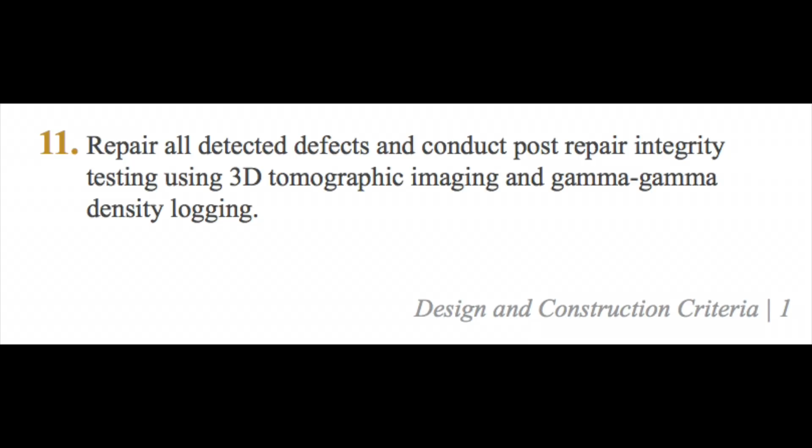I want to show you part of their design requirements: that if they conduct repairs, integrity testing using 3D tomographic imaging and gamma-gamma density logging was required per the contract if they ran across issues. Yet we know none of that happened. This video is also going to explore transverse cables and how I think they were part of the problem, not transferring the forces over to the longitudinal cables.

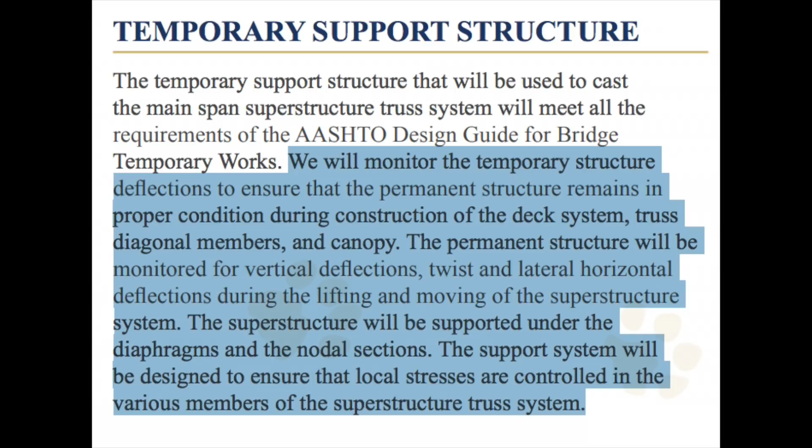Here's a screenshot of the monitoring program, showing it was very important they were going to monitor this deck system. Also, the diagonals were supposed to be supported during transportation, with members supported under the nodes. We know all the nodes were not supported during transportation, only a couple of load points. Here's the monitoring company's tweet, before they removed it, showing the supports not under the nodes.

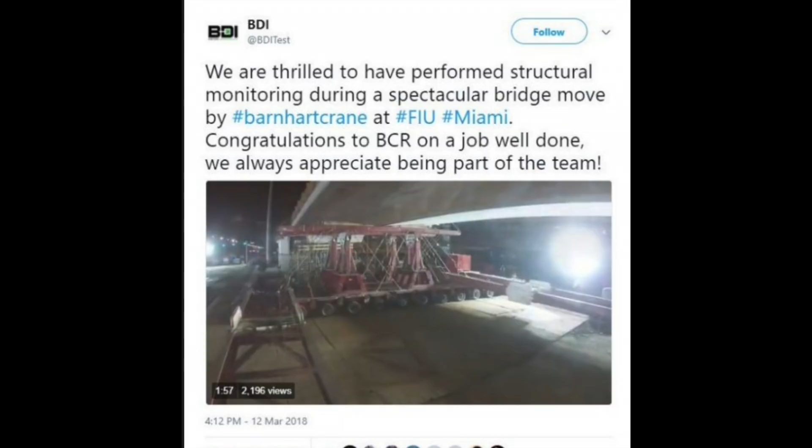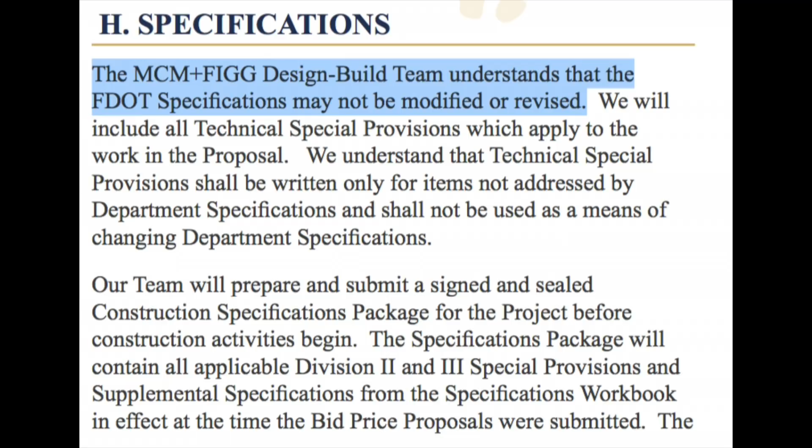I'm considering that this span was complete, so detensioning 2 and 11 would be allowed, based on this being decorative—except it said it would help with resonance. My view is that 2 and 11 are allowed to be detensioned at this point, and the two other ports on each side of the canopy were designed to hold the two structures together.

That's the intent of those two other members—not structural for this span, but meant to hold the two decks together at the expansion joint between them, tying them together at the canopy.

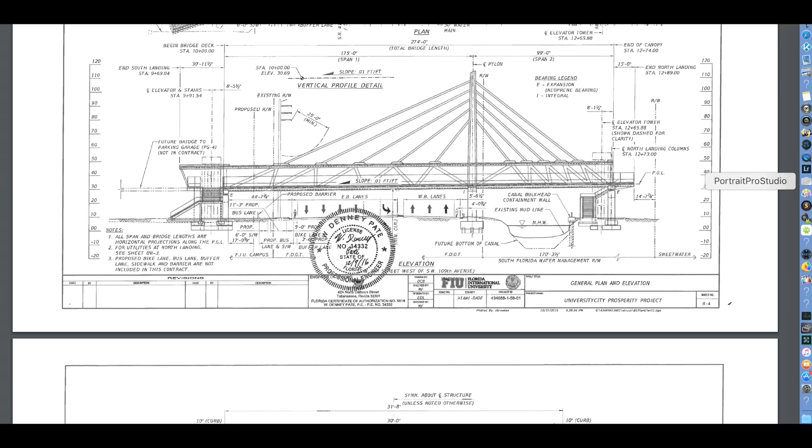Decking was fully post-tensioned, as we appear to know. At this point in the drawings, it states that post-tension members will not be grouted and will be de-stressed after main span construction is complete. Do not remove bars.

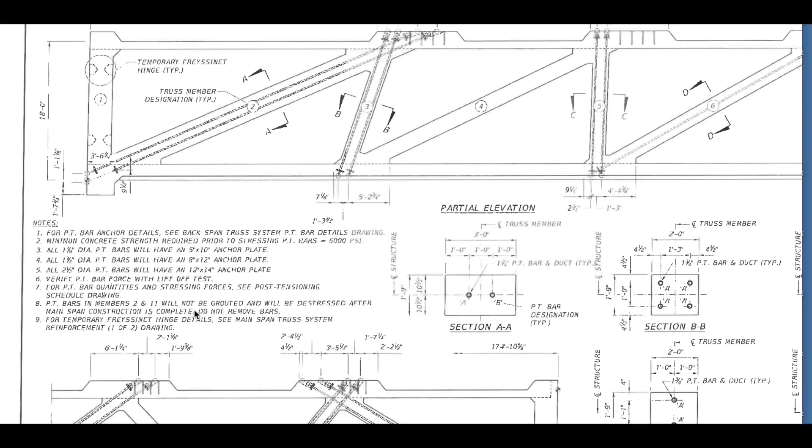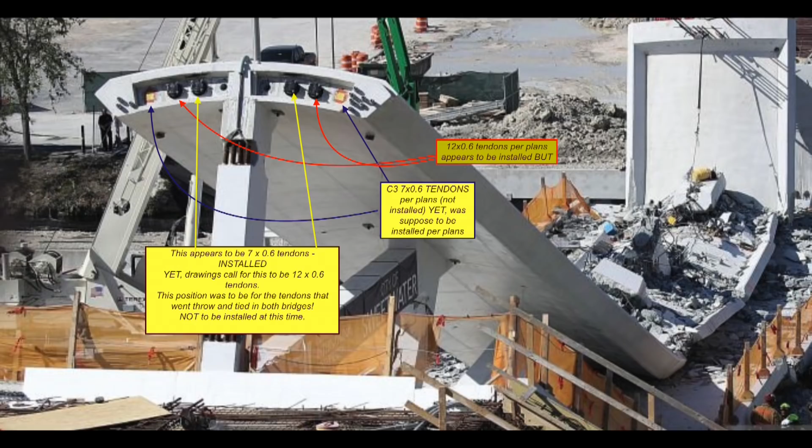Does this also mean they're supposed to detension after transport, or before? I think this was meant to be until after main span construction was complete. One of my theories is that main span construction can't be complete until you also tie in the two decks together using the other two ports here—tying it all in like an expansion joint.

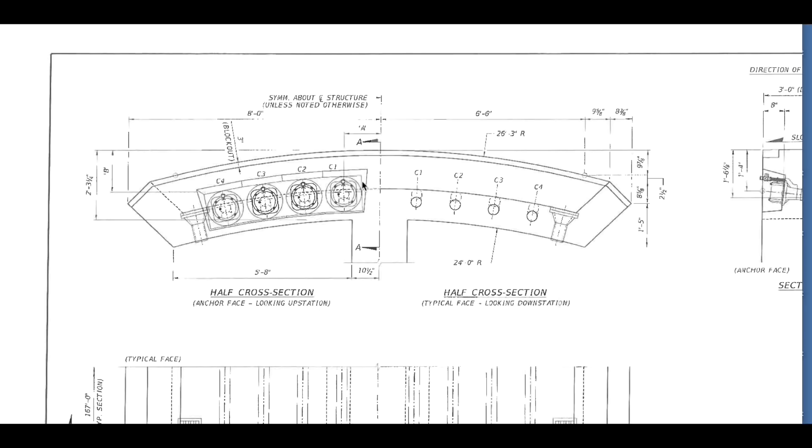So C2 and C3 are installed, and perhaps the intention of C1 and C4—shown here and there—was again just to tie two structures together, meaning they weren't intended to carry load bearing capacity. That's what I'm leaning towards for the intent of C1 and C4.

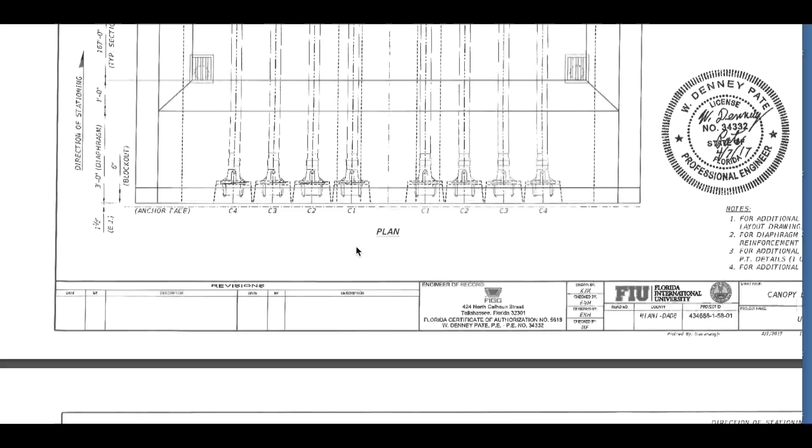So could you detension at that point? Apparently, if that's the intent, the wording addresses that it must be completed, and they would also have to adjust—I'll come back to that. The detail states it's not to be detensioned until the main span is complete, and then 2 and 11 can be detensioned.

Going back over this, circle D, you see detail B—a 16-inch diameter pipe round. This is that detail here. As you can see, it looks like you would be able to get to detension number 11 after all.

I said I didn't know how you'd be able to do that, but I found this detail now, and apparently I didn't pay attention to it earlier properly. It looks like you would be able to detension after the pipes are installed.

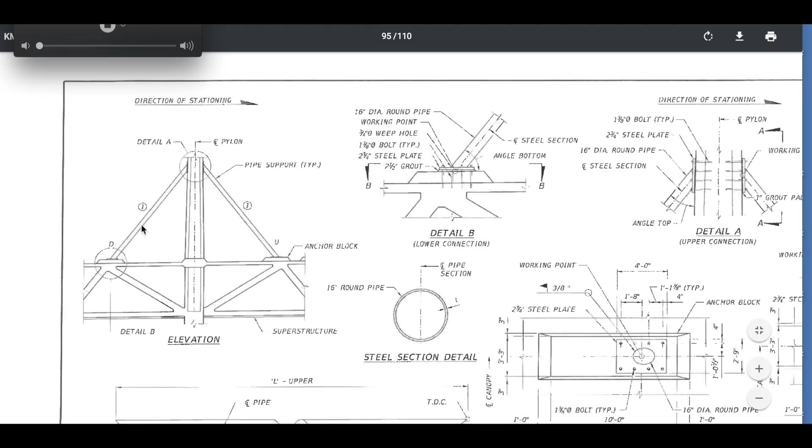This creates a conflict with my earlier statement, and also with what I'm saying now—that you can remove detension 2 and 11 at this point. I'd now state that if you can get to it, well, this span isn't complete until the resonance detail is complete, which was stated somewhere to help with resonance.

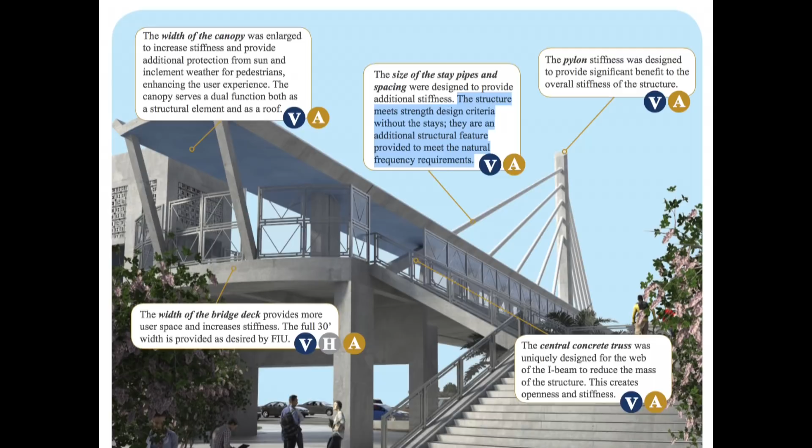So that would be a questionable thing. I'm going to show you what we're going to look at here is this main span again.

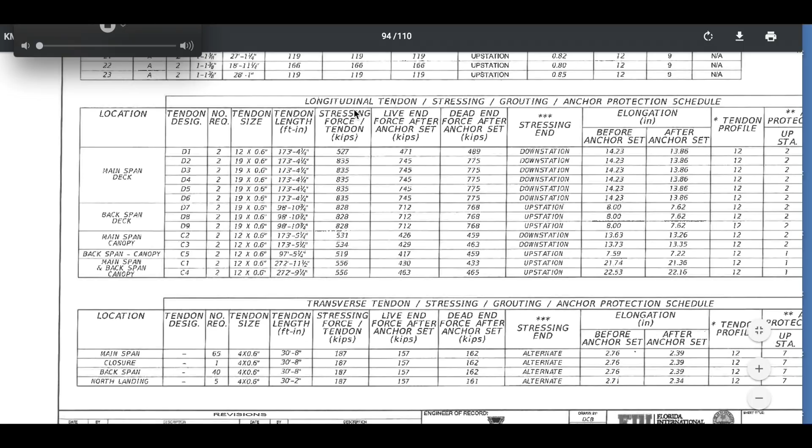These are the transverse longitudinal cables. See right here? Take note of D1, we're going to visit this again. D1 is 471 kips. D2, which is next to it, is 745 kips. So recall these two, and most importantly, the transverse cables, recall this.

The main span, all of them, 65 of them, will get 187 kips, and then it will be released at 157. I want you to keep in mind that these numbers appear to be 70% of the ultimate failure number. Basically, that's the margin they worked with consistently with all of the post-tensioning I've seen with the transverse and longitudinal cables. So let's go from there.

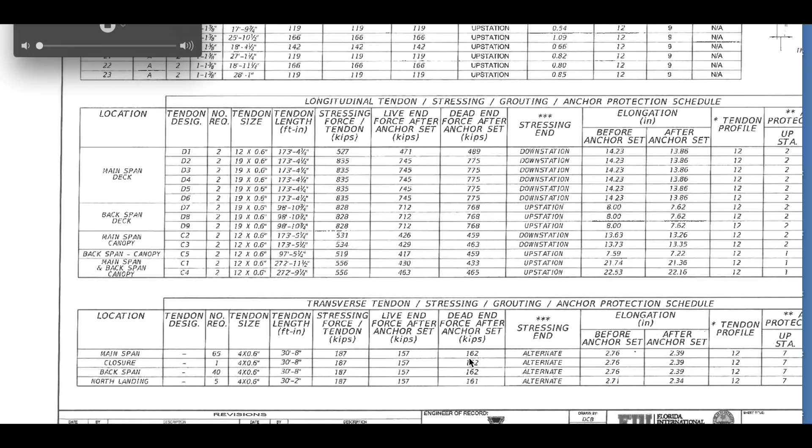And then on this one would be the 162 on that end and 157 on that end. So pick your poison. What I'm going to show you is that we only have 150, you can call it 200 kips, we can round up if you like, of resistance on the transverse cables. Take note of the location of the...

Please allow me to take liberty in the next part of this video. I'm going to use a section of the video of the drawing to demonstrate the transverse cable. It is not the literal part of failure in the drawings.

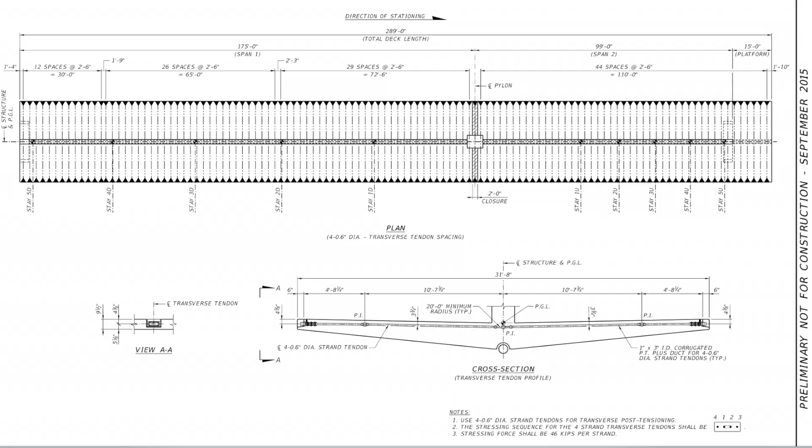Thank you. The base where they meet, the node area at the deck. Here's the longitudinal cables, and this would be D1, and D1 would be the same distance from center line over here approximately. They only show half the structure, and then you do it symmetrically.

So you can see that it doesn't land - I talked about this, it doesn't land on land. It's not over top of the longitudinal cables. The ducting was a big issue for me here, where they put the plumbing, where they had nothing underneath it directly. So for this load to transfer over to this D1, and the D1 over here also, it would have to span the distance with the concrete and any metal reinforcement they have.

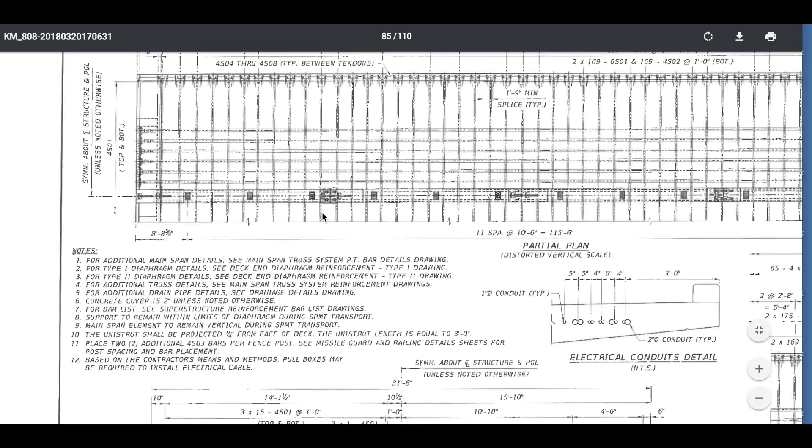And you then add the two transverse cables that are close to it, this one and this one, and you can see it basically surrounds it. In this case, it looks like it's in line with it pretty good, but the distance here is great. It's 1 foot 10 center line, as we recall roughly, and 1 foot 10 here. So you've got that 3 foot 8 inches, I think, approximately from width to width.

That this load would have to start transferring over to the first transverse cable out the opposite directions. And to do that, they use the transverse cables. But these transverse cables are only capable of holding what? So 200 kips and 200 kips, 400 kips. They had a little more before failure. This is very questionable - they're not capable, I think, of transferring the loads without elongating these two here to make it over.

Now that node on the underside, we don't have super details of it or the reinforcement, but we do have apparently a detail of how these transverse cables come under there. I'd like to look at this some more, but I can see where this would cause a deflection, cracking in the deck even around this area.

In this case, we have a real video of failure, and it's right about here. Which is oddly, you know, it's like these two held up, and then forces didn't quite make it out to here. Only if it made it out, you know, and stayed on top of the longitudinal cables, we'd have all these forces, but the transverse cable seems to be lacking.